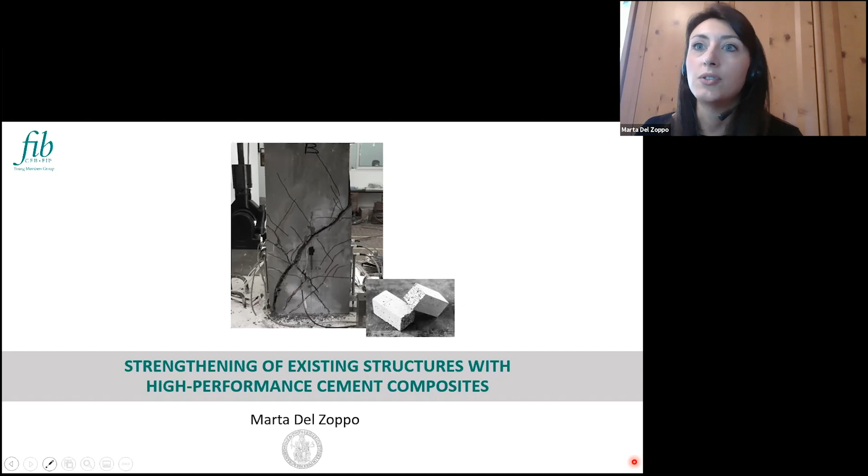Many thanks, first of all, to the FIB for this opportunity given to young researchers to expose and talk about their work. Today I will discuss with you the potential of using high-performance cement composites for the strengthening of existing reinforced concrete structures. This is the structure of the webinar.

We will start with a brief introduction about the needs of existing reinforced concrete structures, and the presentation of the definition of high-performance cement composites and their mechanical properties. Then we will see some typical applications of such materials for the strengthening of structures, and then we'll focus on the seismic strengthening and seismic performance of columns with this kind of strengthening solution. Then we will see a comparison of this new technique with the consolidated jacketing using fiber reinforced polymers, and then we will see the conclusions.

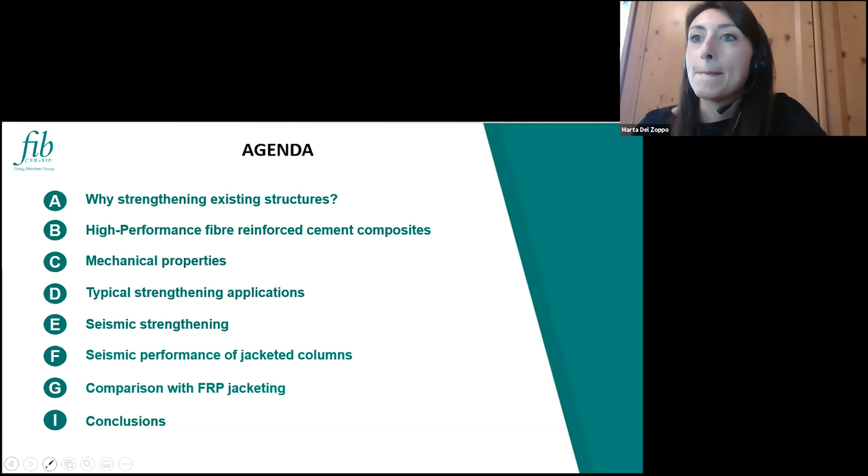So nowadays, let's start with why we want to strengthen existing structures. So the topic about strengthening is quite...

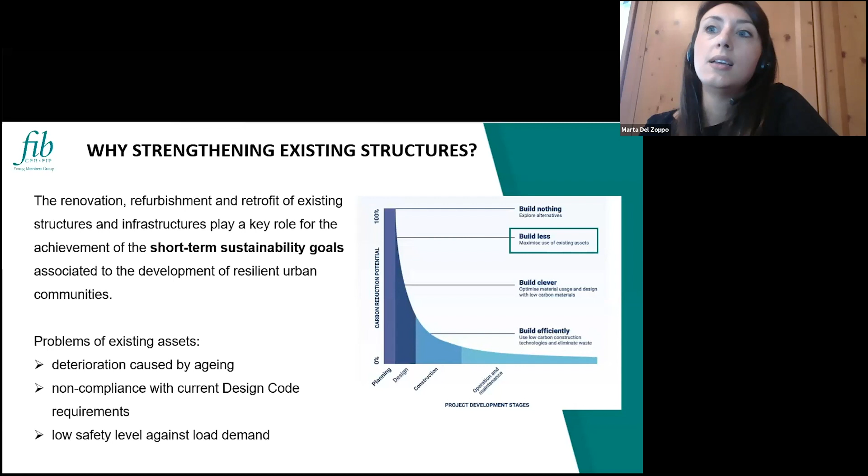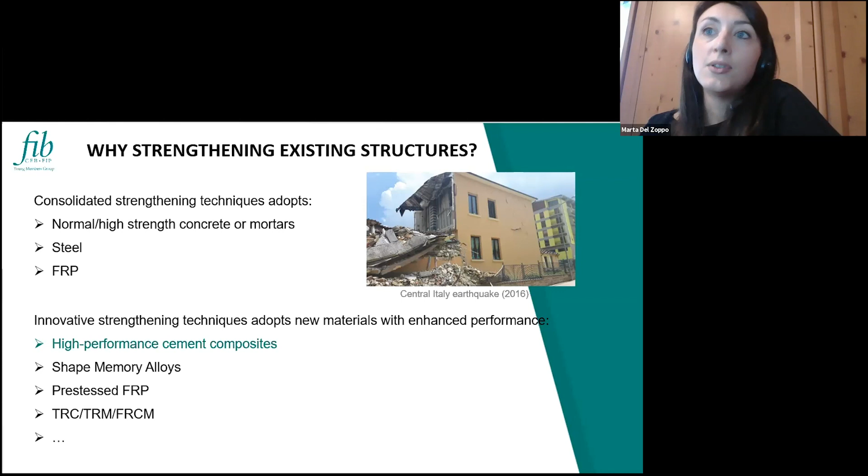We currently have in this field several well-consolidated techniques for structural strengthening of existing assets, using traditional materials and innovative ones like fiber reinforced polymers, which can now be considered a consolidated approach for strengthening structures. But we also have several new materials and composites with improved performance that can be considered emerging, more efficient strengthening solutions.

Today we are looking at a class of relatively new materials classified as high-performance cement composites. These materials are characterized by high compressive strength, up to 150 megapascals in compression. This increase in compressive strength has a drawback, which is the brittleness of the material.

To contrast this brittle behavior, we can add fibers—short or long discontinuous fibers—inside the material to improve its tensile behavior. This kind of material is called fiber reinforced cement, or cementitious composites.

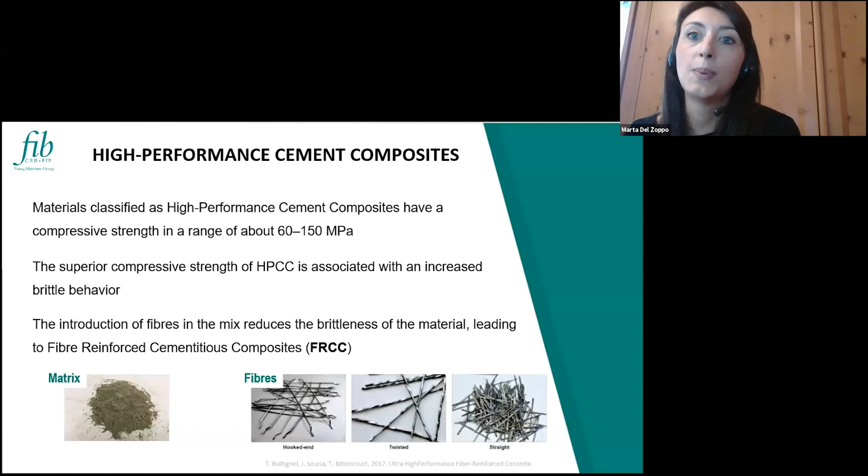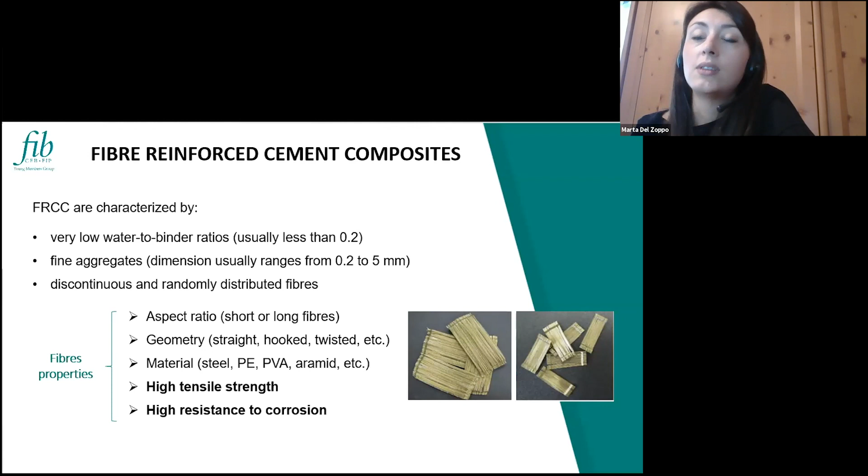Fiber reinforced cement composites are characterized by a very low water-to-binder ratio and very small or fine aggregates, along with the addition of discontinuous and randomly distributed fibers that can have different aspect ratios, geometries, and materials. The most important thing is that these fibers should have high tensile strength and high resistance to corrosion in order to improve the durability of the composite system.

Looking at the general properties of such materials, thanks to the effect of the fibers embedded inside the matrix, we have high tensile capacity, as well as high fracture resistance, since the fibers allow control of crack formation and propagation inside the material during load conditions.

Given the low water-to-binder ratio, these materials have very low porosity and shrinkage, so they can ensure high durability and also a carbonation-suppressing effect when applied to existing structures.

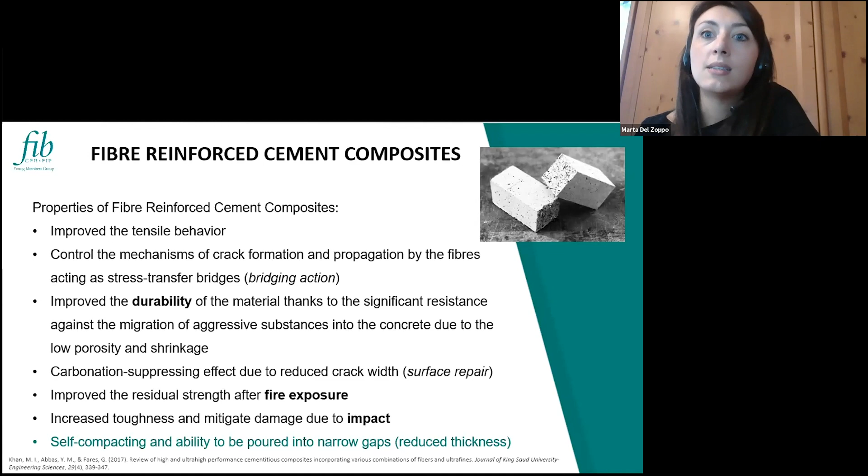They also have improved residual capacity under high temperatures, for fire exposure, and high toughness that ensures good resistance against impact loads. Last but not least, these materials are self-compacting in the fresh state, so they can be poured into very narrow gaps, allowing them to be applied on structures in very thin layers. This is a very good and important characteristic for strengthening applications.

These fiber reinforced cement composites are classified based on their tensile behavior, which strictly depends on the fiber's volumetric ratio inside the matrix. If the volumetric ratio is lower than 2%, the material will have strain softening behavior in tension.

After the achievement of the peak tensile capacity, there is the development of a first microcrack in the matrix, followed by a sudden loss of capacity and a residual tensile stress caused by the bridging of fibers inside the matrix. This is called strain softening because after the peak we have a reduction of tensile capacity, typical of materials called ordinary fiber reinforced cement composites, similar to fiber reinforced concrete.

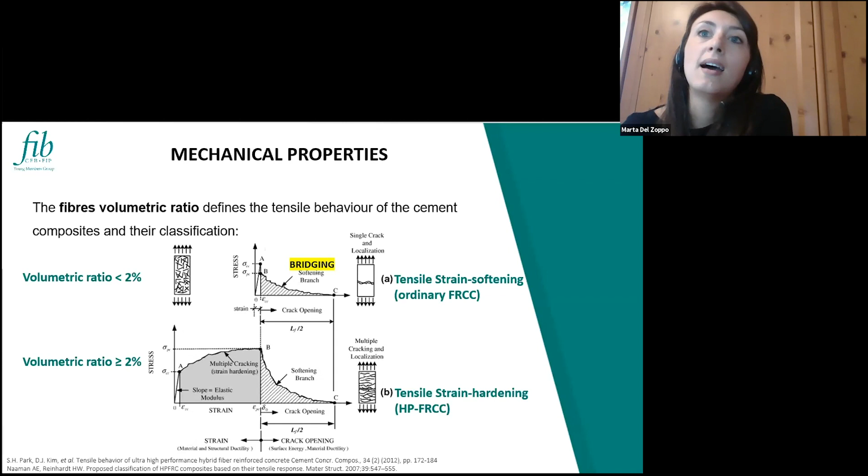After the first crack, there is an increasing tensile capacity until the maximum tensile capacity of the material is achieved, and then again strain softening behavior up to failure. These materials are called strain hardening, and are classified as high performance fiber reinforced cementitious composites.

Ordinary and high performance fiber reinforced cement composites are currently applied for the repair and strengthening of structures, even though up to date we don't have any guideline that regulates the design and application for such kind of strengthening solution. The most typical applications are under ordinary load conditions, mainly consisting of the retrofit of bridge decks.

In particular, we can do an overlay of the high performance fiber reinforced cement composites over the decks of the bridge, and this is adopted to mitigate the deterioration of the bridges under aggressive salt attacks, and also to improve the durability of the decks.

Such materials are also commonly applied as a surface repair, without any structural effect, just to protect the deteriorated concrete surface, because of the high durability of materials. This approach is used for structures in aggressive environments like cold regions, offshore structures, and dams, but also as protection to prevent fatigue cracks, because of the higher crack control.

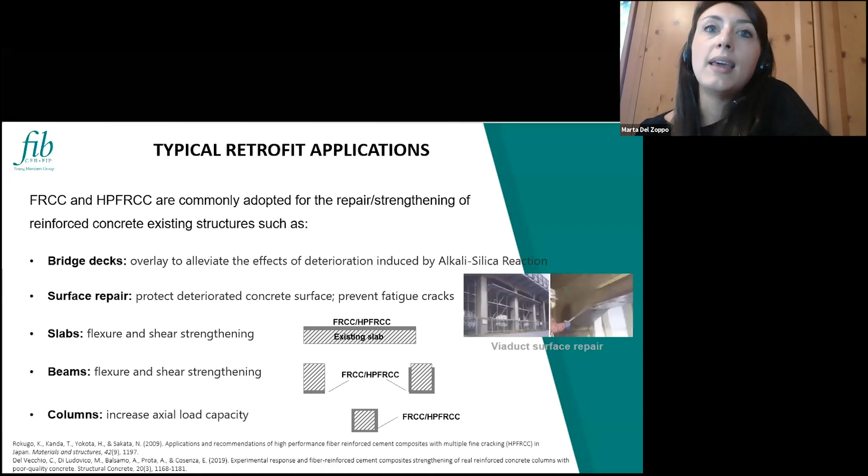We can also have application on beams and columns. In the case of beams, we can increase both flexure and shear capacity thanks to application at the bottom of the beams or on three sides, like a U-wrap of the beam with this additional fiber reinforced cement composite jacket. Or in the case of columns, adopting a full jacketing of the member with this new material, we can increase the axial load capacity thanks to the confinement.

The adoption of such materials for seismic strengthening is still under investigation, and only a few examples of this can be found up to date in literature.

When we talk about seismic strengthening, we need to first understand which are the main deficiencies of our existing assets. Existing structures are often designed according to very obsolete seismic design codes, or sometimes also for gravity loads only, and usually exhibit very poor performance during earthquakes.

The main issues of these kinds of structures are related to the lack of details. In general, we have the lack of transverse reinforcement inside the beam joint panels, so we don't have stirrups inside the joints. There's also a lack of stirrups or transverse reinforcement in columns and shear walls, and other design issues related to a wrong strength hierarchy between beam and columns, but also between flexure and shear.

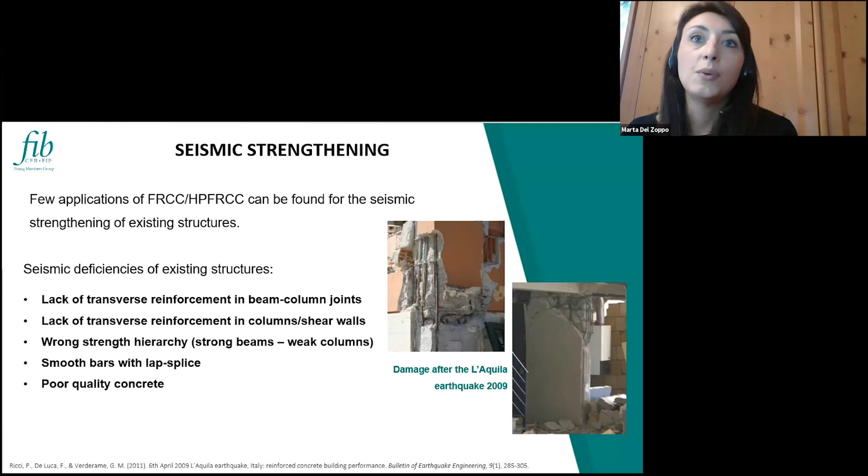For buildings built before the 70s, usually we have the adoption of smooth bars with lap spliced regions, and also very poor quality concrete because the quality of materials was lacking at the time. So often we have concrete with very, very poor compressive strength.

FRCC and high-performance FRCC can be adopted as a seismic strengthening solution in terms of jacketing for beam column joints. We can apply an overlay of this FRCC or high-performance FRCC on the joint panel to increase the shear capacity of the joint.

Or in the form of jacketing for columns and shear walls. This jacketing can involve the full length of the specimen or just be localized at the bottom, for example, in the case we are dealing with intervention on the plastic hinge region or for the lap splice region.

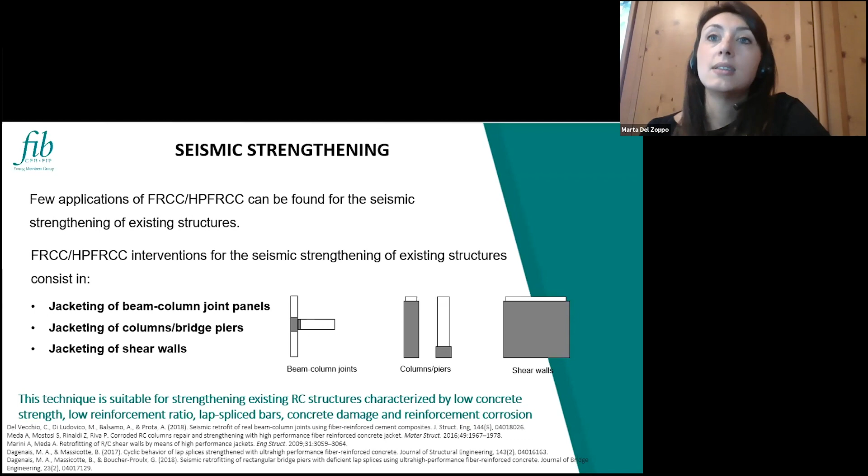In general, we can say that this kind of strengthening solution is suitable for structures characterized by very low quality concrete and also some deficiencies like low reinforcement ratio, lap spliced bars, and also in the case of deterioration, when we have problems related to the corrosion of the members.

Let's now see how the jacketing with the FRCC actually works. First, we need to understand the actual condition of the asset we want to strengthen. If the substrate of the member is in good condition, we can apply the jacket over the existing original concrete cover, and in this way we are doing a sort of cross-section enlargement of the element.

First, we need to clean the surface and repair if there are, for example, cracks, hairline cracks, with epoxy injection or mortars. We need to increase the roughness of the surface because we need to ensure a good bond between the existing concrete cover and the new material and the jacket.

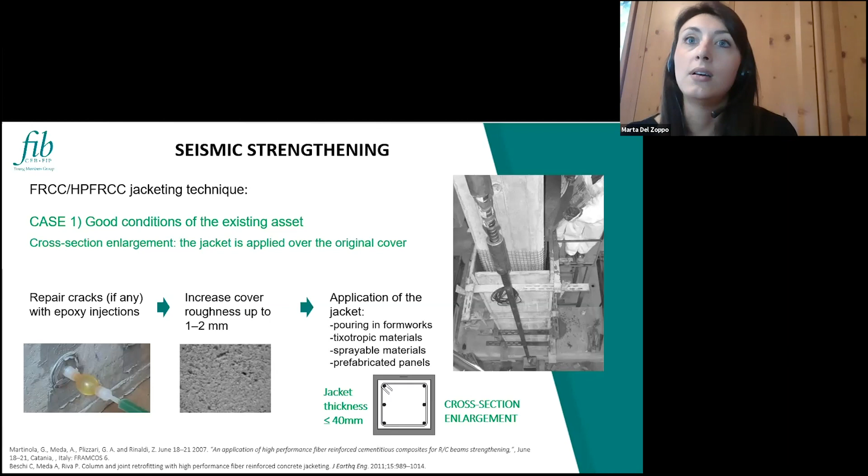So we need to sandblast the surface or increase the roughness with hammer jacks or other methods, and then we can apply our jacket with different kinds of materials—it can be thixotropic, sprayable, or prefabricated panels. The point is that this kind of material works well when applied in very thin layers, so basically this jacket can have a limited thickness, usually less than 40 millimeters. Even if we're doing a cross-section enlargement, this is really negligible compared to other applications like traditional reinforced concrete jacketing, where we deal with very massive cross-section enlargements.

The other option is for structures that are already deteriorated, which is usually the most common condition in our countries due to lack of maintenance. Usually our structures are very deteriorated, with the concrete cover cracked or detached and corrosion of the bars. In such a case, the alternative is to replace completely the original cover with a new one made with this FRCC, creating a high performance cover for the member. The first step is to remove completely the cover and clean the bars if there's corrosion, then repair the member if needed.

If there are cracks, we need to do some epoxy resin injection. But we don't need to increase the roughness, because thanks to the removal of the concrete cover, the surface will already be rough enough to ensure a good bond between the jacket and the original member. Then we can apply the new concrete cover. In this case, the cross-section enlargement is really null or negligible, because the jacket completely replaces the original cover.

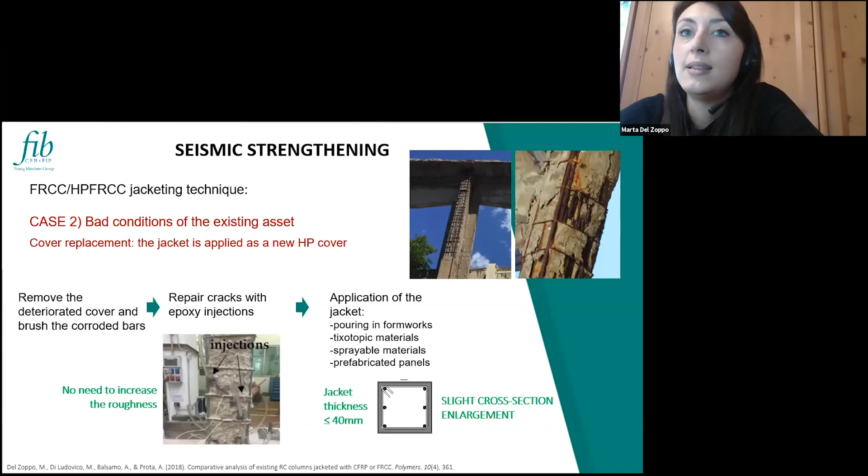If you want to use the tensile capacity of the jacket, the FRCC, for increasing the flexural capacity of the member being strengthened, the jacket needs to be anchored to the foundation or footing. Otherwise, the tensile zone will not collaborate in the bending moment resisting mechanism.

Different solutions have been investigated so far. One consists of creating a pocket inside the footing, which will be filled by the FRCC during casting or application, creating a solid connection between the element and the foundation. The other option is to add additional light longitudinal reinforcement just in the critical zone of the member to guarantee the connection between the footing and the jacket.

In this case, we need to consider that the thickness of the jacket is really small, so to avoid corrosion issues, we need to select a material and diameter for these bars that can avoid durability problems and corrosion. In any case, when we increase the flexural capacity of the members, we also need to ensure that the correct hierarchy between shear and bending is respected. Otherwise, we create a new problem—a shear critical member. So when we connect the jacket with the foundation to enhance flexural capacity, we need to pay attention to shear capacity too.

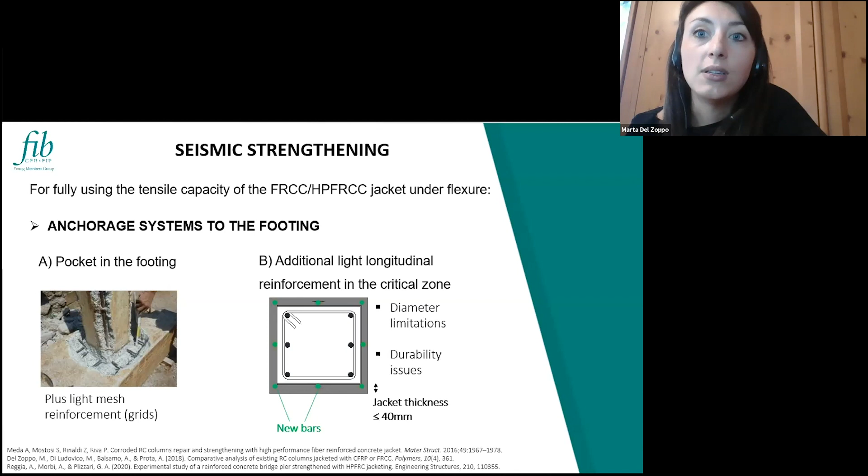So after this general overview about the use of fibre reinforced cementitious composites as a strengthening technique, we will now see in detail how jacketed columns perform during seismic actions. For this application, I'm adopting a 30mm thick layer of fibre reinforced cement composite with strain softening behavior. This material is applied for the full length of the columns in replacement of the original cover, with a very slight cross-section enlargement. The columns we are analyzing are made with poor quality concrete with an average compressive strength of about 15 megapascal.

These are the mechanical properties of the FRCC we're adopting for this application. As I said, we have high performance in compression—a compressive strength of about 120 megapascal. And in tension, we have a peak strength of about 4 megapascal, with this strain softening behavior, with residual tensile strength given by the bridging effect between the fibers. For this material, we have a low volume ratio of fibers, less than 1%, and short—we're dealing with short plain fibers with length less than 20 millimeters.

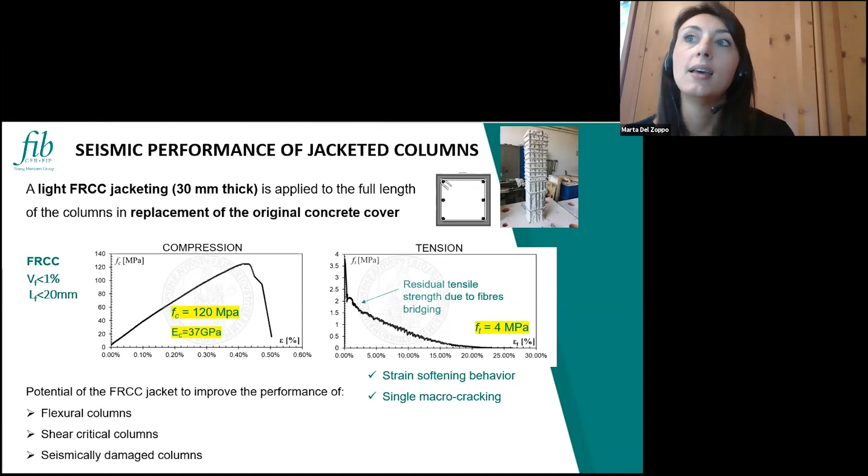Now we will see the potential of using such jacketing technique for improving the performance of flexural and shear critical columns, and also for the retrofit of columns that have already experienced an earthquake and are likely damaged after this event.

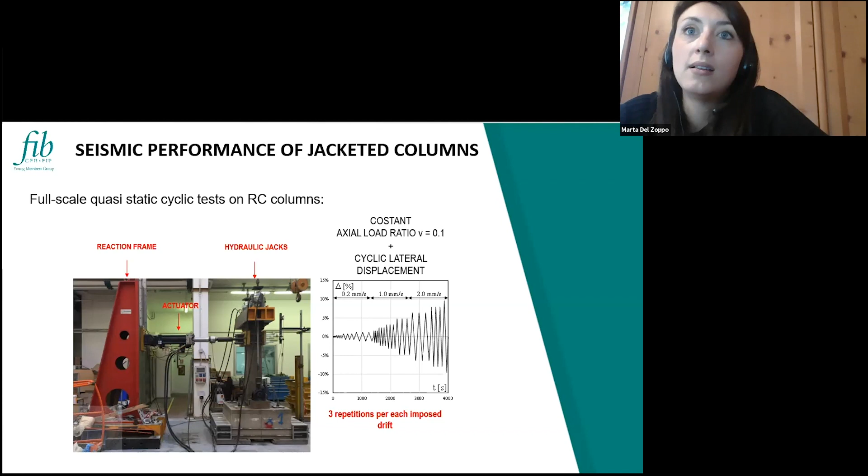To assess the seismic performance of the jacketed columns, we performed full-scale quasi-static tests with this setup and load protocol, so cyclic lateral loading. The behavior of the jacket has been monitored during the test by means of digital image correlation, a technique that allows tracking of the behavior and the strain distribution during the test on the jacket.

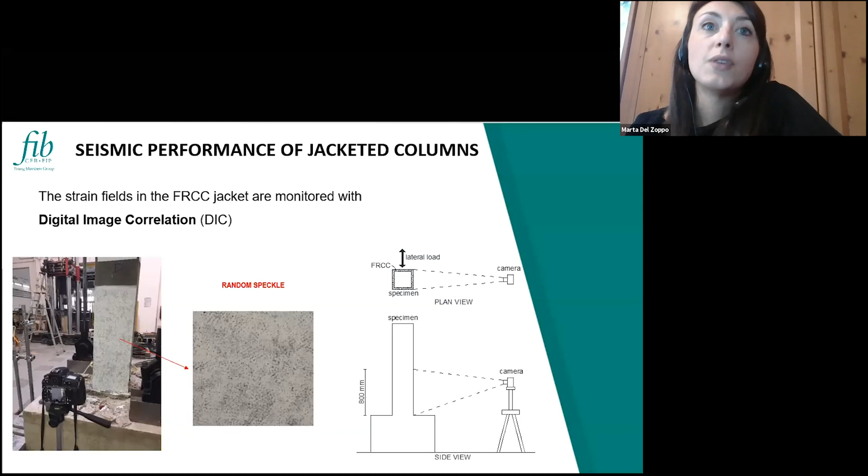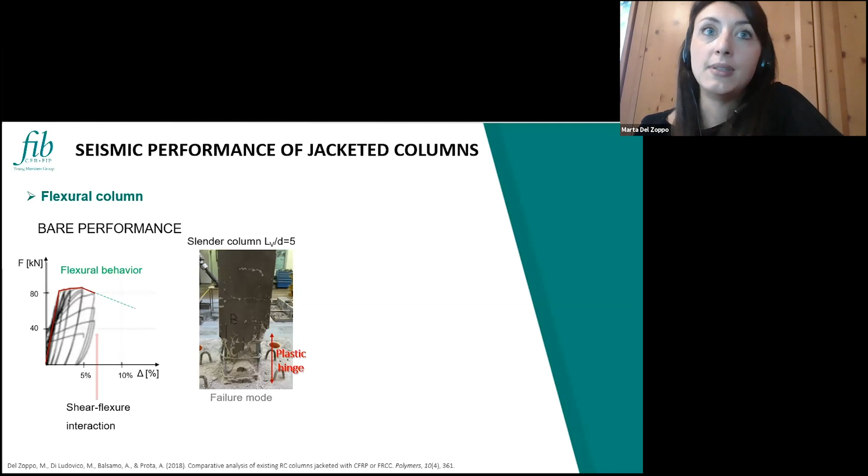So this is the first application, on a slender column governed by a flexural failure mode. During the test, the column developed flexural behavior, achieved the maximum bending capacity, and then showed a sudden drop in lateral strength caused by shear-flexure interaction, which of course limited the ductility of the specimen.

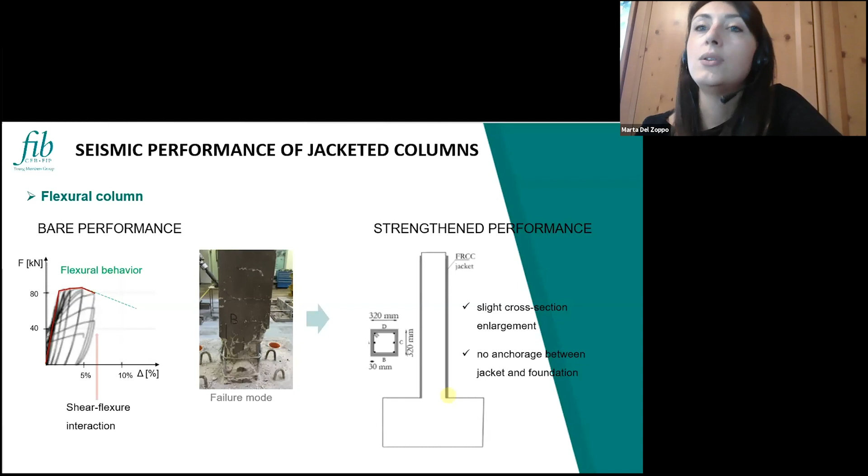The same specimen, without any damage, has been strengthened with the technique discussed previously. In this case, we are slightly increasing the cross-section from 300 to 320 millimeters, and we are not adopting any anchorage system between the jacket and the foundation, because we don't want to increase the flexural capacity of the specimen, but just to look at the possible increase in ductility.

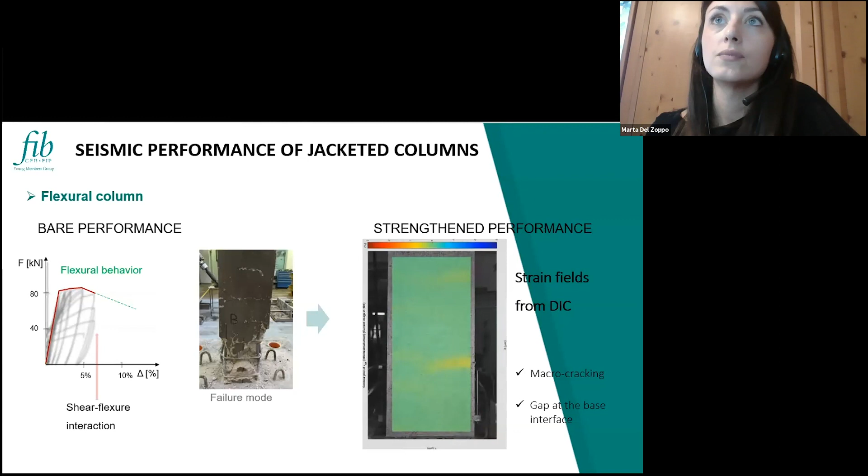We can also note that a large gap is opening at the bottom of the specimen, at the interface between the jacket and the foundation block. This large gap opening at the base of the specimen suggested that the behavior of the jacketed column was actually behaving like a rigid body more than like a flexural element, developing a rocking with respect to the base of the element at the base section.

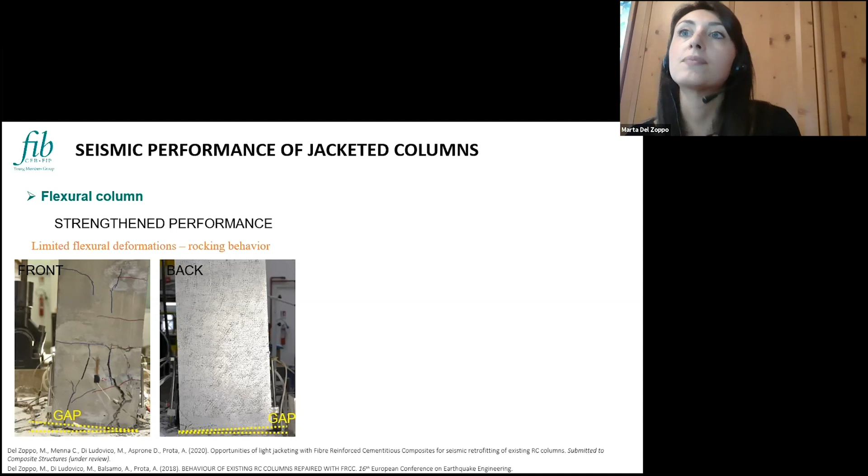To further understand the overall performance of the jacketed columns, we performed a curvature analysis starting from the DIC records. The digital image correlation is able to provide a picture of the strain over the surface of the element at each instant of time. From these strain values, we can define the cross-section curvatures at any step of the test, and then define how these curvatures change over the length of the specimen for each imposed displacement or drift.

This is the plot of the cross-section curvature over the height of the specimen during the test for different imposed drift ratios. We can see clearly that the curvatures in the potential plastic hinge regions are almost zero, meaning that the flexural deformations are almost negligible for such a column, and that all the deformations are actually concentrated at the base interface in the form of base rotations.

And these peaks that we are observing in the plot are actually false curvature peaks that correspond to the opening of the jacket we observed during the test, the opening of cracks in the jacket. So basically, they are rigid rotations around the crack developed in the jacket.

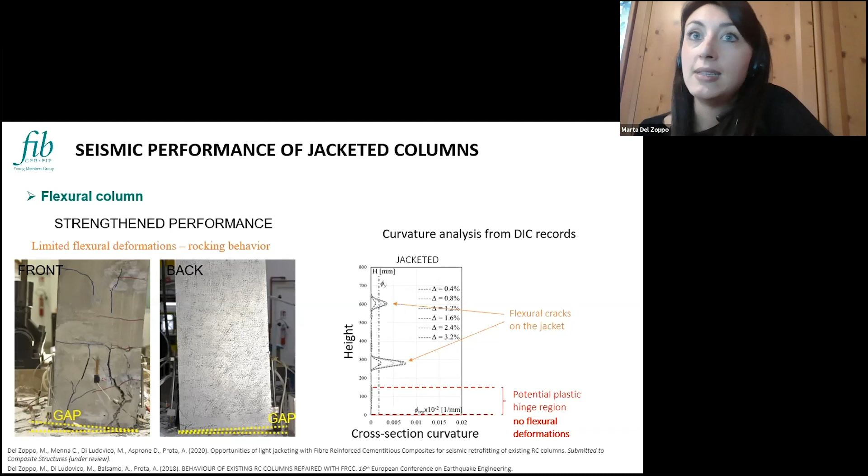And this is the failure mode of the jacket. Up to a certain level of deformation, we achieve the crushing of the jacket with a sudden loss in lateral capacity, basically related to the strain softening nature of this material.

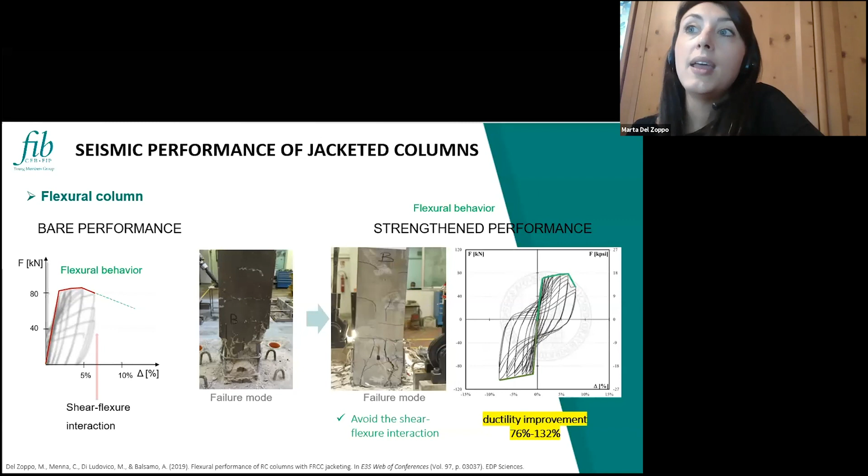So when we have a crack in the jacket, it will open very fast after the bridging of the fibers. However, the jacket was able to prevent the shear-flexure interaction that we observed in the bare column, and also significantly increase the ductility of the element.

Then the second application is about shear-critical columns. In this case, we have another specimen that exhibits a very brittle behavior during the cyclic test, with poor ductility performance and without achieving the yielding of the rebars. These are the classical diagonal cracks developed on the specimen due to shear.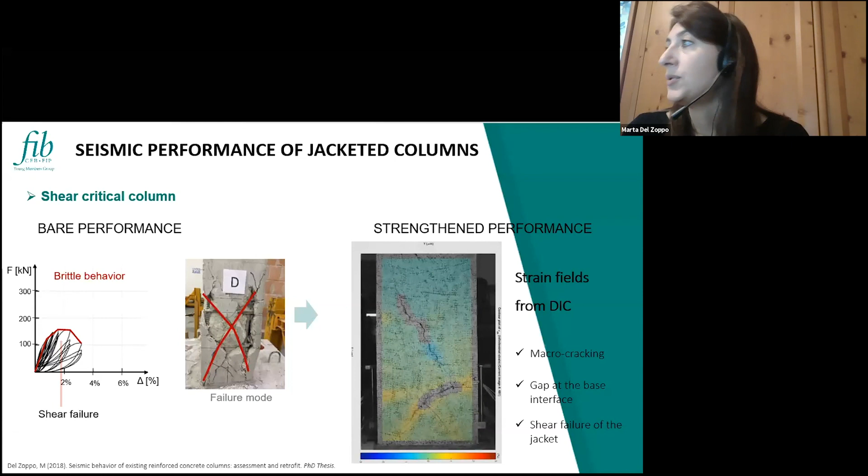We can still see, since the beginning, this rocking behavior around the base of the column at the foundation interface, and the opening of the first flexural cracks, flexural behavior until now. Then we have the first opening of the diagonal crack due to shear. The fibers work to bridge the crack and close it, until we have the final opening of the jacket caused by the shear.

So if you look more in detail about the failure mode and the shear crack, we can see how the fibers that are crossing the crack are trying to bridge the two edges of the crack until we have the complete debonding of the fibers.

Of course, we are working with short fibers, less than 20 millimeters length. So when we have the complete debonding of the fibers, we have the complete opening of the jacket.

And in terms of performance, if we compare the capacity curves, we can see that the jacket allowed the achievement of the flexural capacity, and so a ductile behavior for the specimen.

And also in this case, when we have the opening of the jacket, we observe a sudden loss of capacity. This is clearly given by the nature of this material, which is strain softening, related to the kind of material we are using for this test.

This is just to compare how the behavior of the specimen changed, just replacing the original cover with a new one made with Fibre Reinforced Cementitious Composites, FRCC. We completely changed the failure mode and increased the ductility of the specimen.

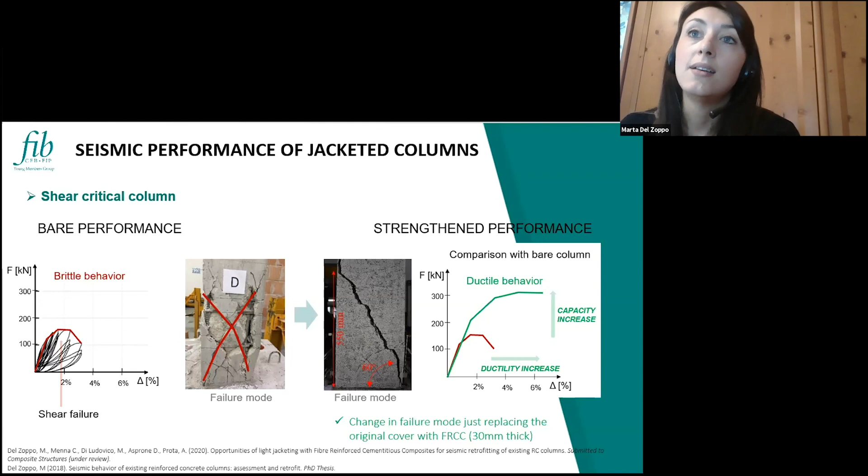Finally, the last application is to show how the jacket can modify the performance of seismically damaged members. In this case, the same flexural columns we saw for the first application were pre-damaged with this input, achieving a 3.2% drift.

And then we applied the jacket, so basically we repaired the specimen because it was damaged. We removed the concrete cover, repaired the cracks with epoxy resin injection, and then cast the jacket.

In this case, we also considered possible anchorage systems to recover and try to increase the flexural capacity a bit. We created a pocket inside the foundation block, as visible in this picture, and cast the jacket to have a higher bonding surface between the jacket and the foundation.

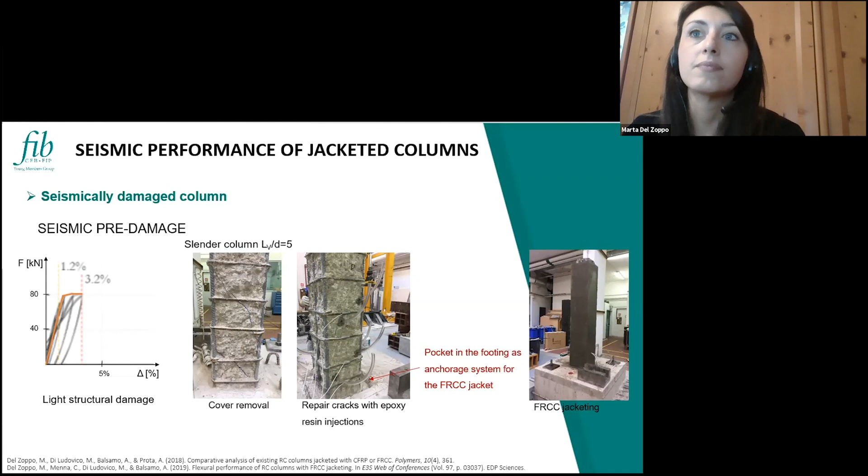And this is the behavior of the retrofitted column. If we look at the capacity curve, we had a full recovery of the original capacity and also a slight increase in flexural strength, full recovery of lateral stiffness, and also good ductility.

But if we look at the failure mode, given this anchorage system adopted for this kind of test, we observe the formation of cracks inside the foundation, and then the creation of a sliding surface inside the foundation, which is an undesired failure mode.

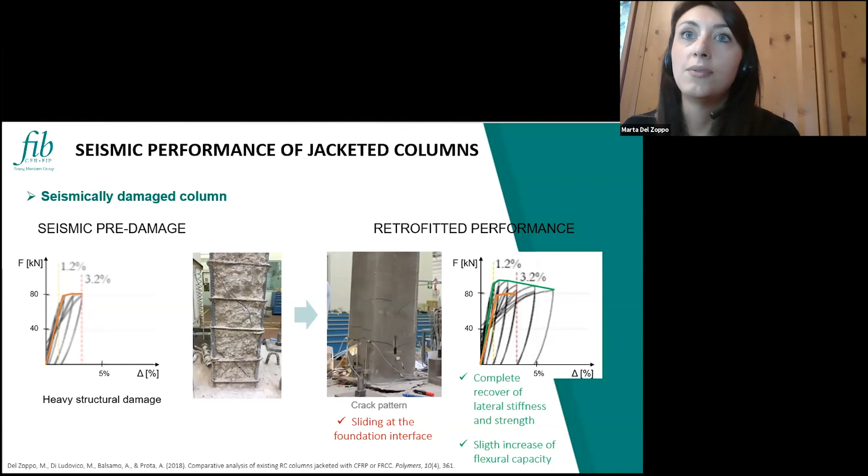So basically, other anchorage systems need to be considered if we want to apply and adopt flexural strengthening for these techniques.

But in general, if we compare the behavior of the damaged and retrofitted specimen with the behavior of the bare one, the original without any damage, we see a very good result in terms of recovery of the original capacity, and we are also avoiding the flexural-shear interaction observed in the original specimen that limited the ductility.

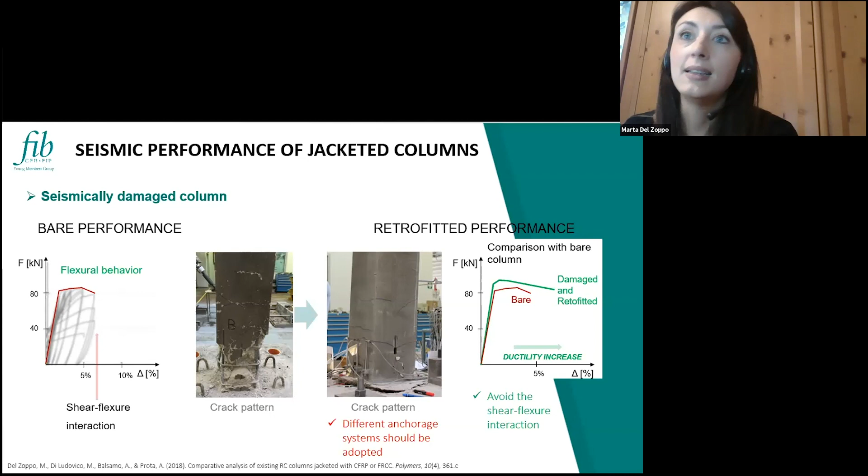So until now, we have seen and understood how these materials behave when used as jacketing for members under seismic actions. Now we can see some comparison between this new jacketing technique and a more consolidated one, which consists in the use of fibre reinforced polymer jackets for the members.

In this case, we are comparing the flexural column, the first application we saw, with the same column jacketed just at the plastic hinge region with one ply of carbon fiber reinforced polymer with unit weight of 600 grams per square meter.

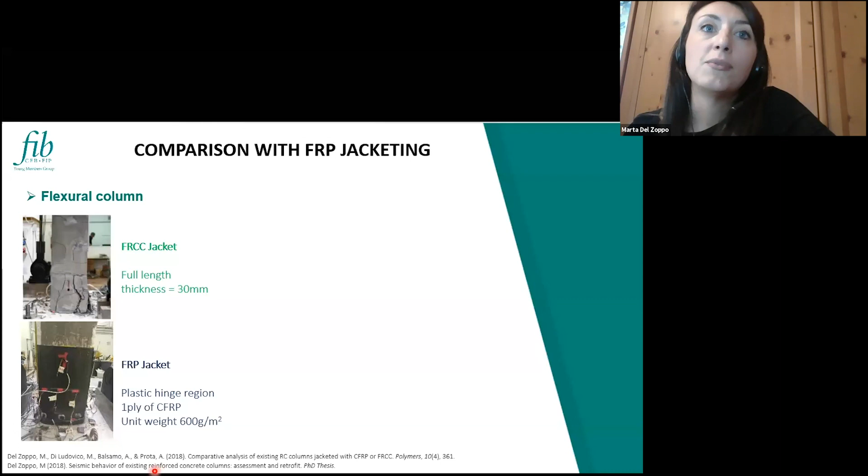And if we look at the comparison of the behavior, we see a bit of difference between the two performance curves. Basically, when we deal with fiber reinforced polymers, we don't have any increase in lateral stiffness or flexural capacity, because we are just applying a passive confinement for the member.

But we are preventing any kind of sudden failure modes that can reduce the ductility of the specimen, and we allow a very gradual softening branch.

While in the case of the FRCC jackets, we have this slight increase in lateral stiffness and also a slight increase in flexural capacity, and this is related to the slight cross-section enlargement that we are doing when we apply such kind of strengthening solution.

And we have this increasing behavior until the sudden failure of the jacket. So if you want more deformation capacity and some more ductility, we need to probably adopt longer fibers to avoid the sudden failure after the opening of the jacket, or adopt additional mesh reinforcement to use such a system as a confinement technique.

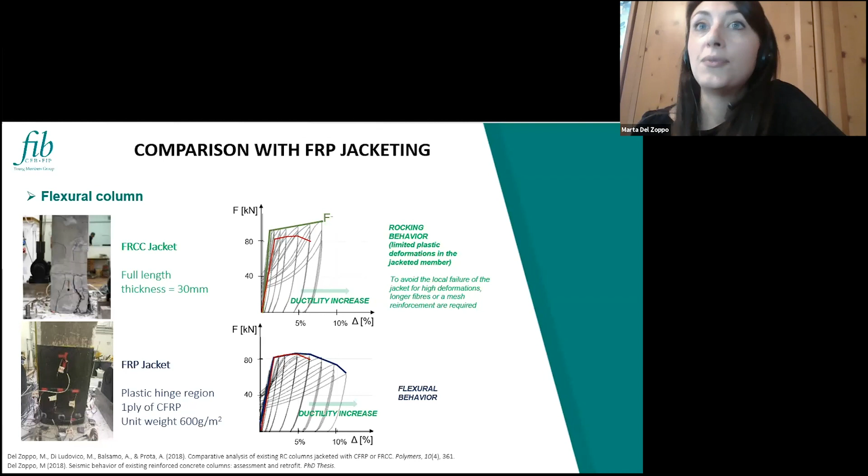And this is the case of shear critical columns. So in this case, we are looking at application 2. Shear critical column, first jacketed with the FRCC.

And in the second case, we have discontinuous jacketing with strips of carbon FRP, same unit weight of the previous case, so 600 grams per square meter. And these strips have a width of 100 millimeters, spaced at 165 millimeters.

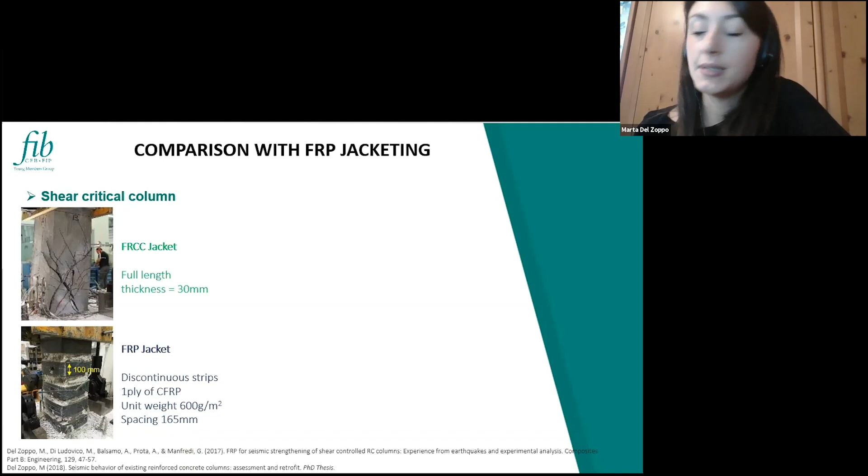But still, we can say that comparing the two systems, the FRCC seems to have high potential and to be a valid alternative with respect to FRP systems, also providing additional benefits such as increase in durability, fire capacity, fire resistance, and resistance to impact loading.

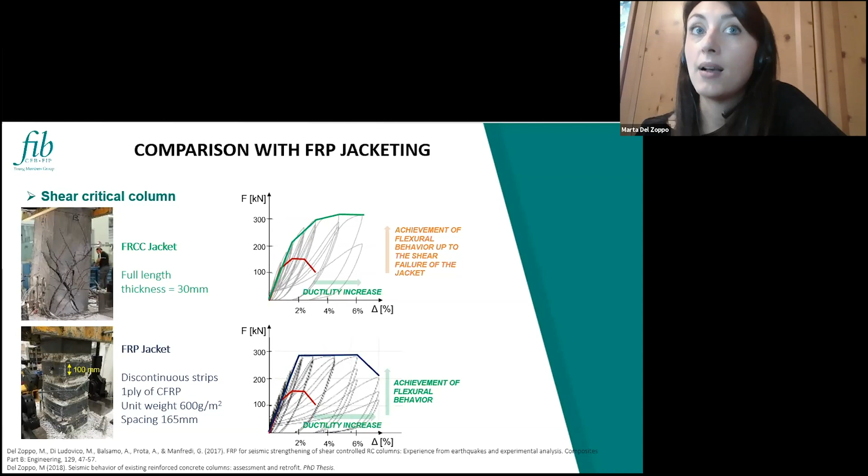So just to conclude, we have seen that the strengthening with high-performance cement composite has a high potential for increasing the structural performance and also the durability of our existing assets. So it can be used not only for surface repairing, but also for structural purposes.

The adoption of such strengthening solutions for shear critical members is highly promising because it allows the change in failure mode. So with just the replacing of the concrete with a new high performance one, we can, in some cases, depending on the column, change the failure mode from brittle to ductile.

These kind of systems can also be used to restore and recover the capacity of lightly seismically damaged members, also increasing the capacity if a proper anchorage system is adopted.

But the point is that this kind of jacket is changing the behavior of the members. So we are not dealing anymore with flexural members that develop flexural deformation, but we still have a deformation at the base of the member in terms of base rotation and a sort of rigid rocking behavior of the entire member itself.

When we deal with small thickness, we need to pay attention because sometimes really small asymmetries in the jacket can lead to a very different behavior in the positive and negative direction of the members. So much more attention should be paid during the application of such materials.